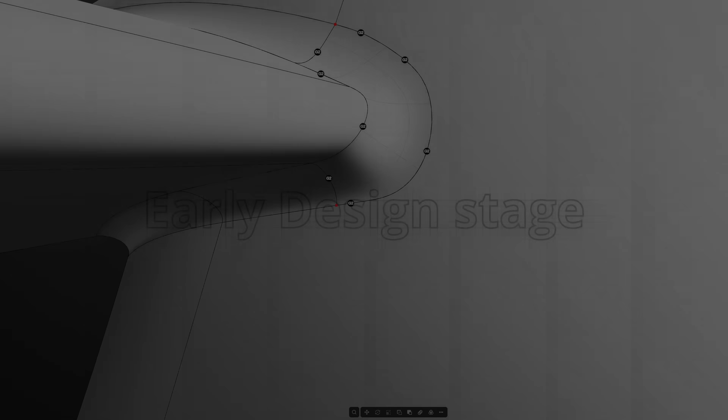So today we're going to do a bit of a deep dive on the early stages of the design process. Chris and I worked together to create the front clamshell of the MRS, basically from the windscreen forwards.

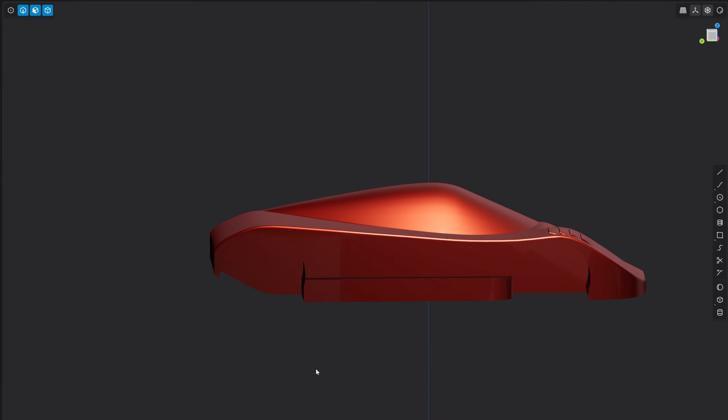So about a year before we even bought the MRS to scan, we came up with an initial concept. We were aiming for the front to be based off the 962C Porsche, the side to be based off of the 787B Mazda, the rear to be from a C9 Sauber. So we merged these three ideas together with the MRS wheelbase.

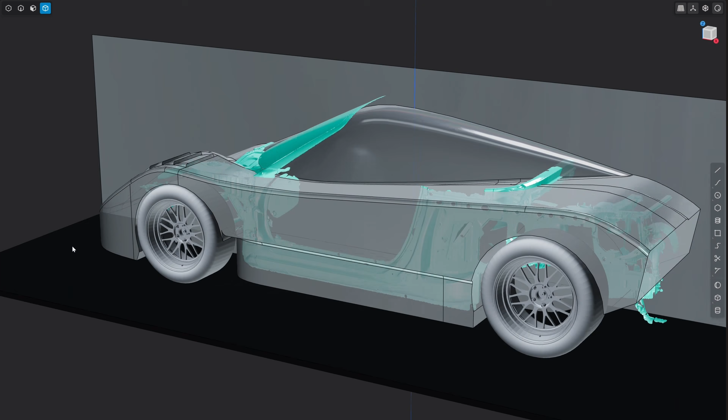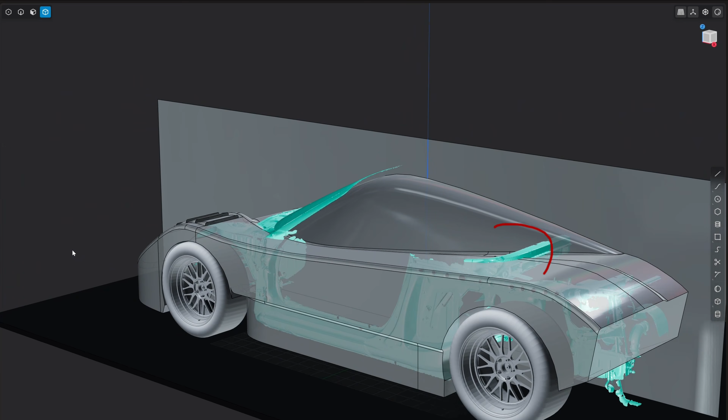Now that we have the 3D scan of the car, which you guys will have seen in our recent video, we can bring that scan into our CAD software. By doing this, we can see what is going to work and what isn't going to work from our initial concept and our 3D scan. The 3D scan poking through the body will show what needs to be cut away or changed in the actual model. So as you can see, there's a few areas that need to change, but overall it's looking okay.

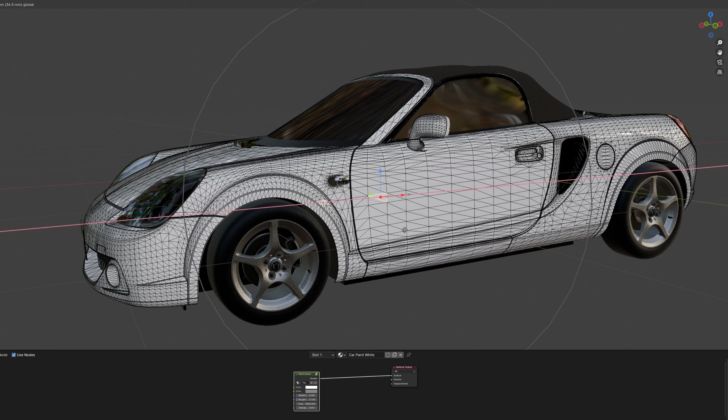Blender is a fantastic animation software that has 3D modeling and rendering capabilities. Its workflow doesn't really tie in with the mechanical engineering based tools that I'm used to. This is due to the fact that Blender uses mesh modeling, whereas all of the other softwares that I've used in the past are solid based. It has a very free-flowing and creator-friendly way of modeling, but it's not very dimension focused. This makes it fantastic for concepts and quick modeling.

In SolidWorks, everything starts with a sketch. That means that everything's derived from dimensions and mathematical formulas. This is great for mechanical engineering, but not great for organic shapes. It does have fantastic tools such as adding threads to holes and aligning multiple components together.

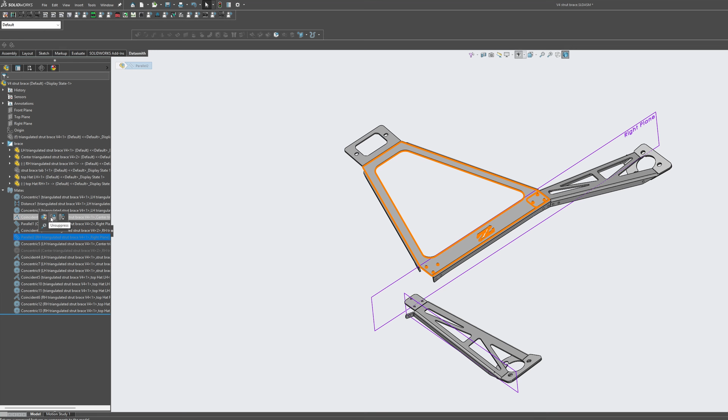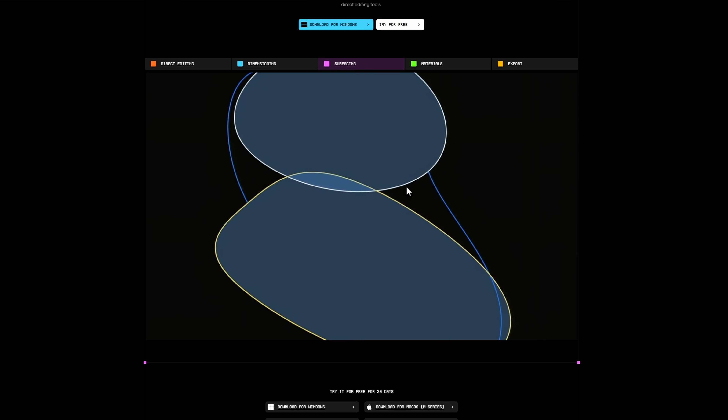I stumbled across Plasticity a few years ago as a similar workflow to a lot of the 3D modeling softwares I'd used in the past. It seems to be fairly free-flowing. It still has some dimensioning capabilities, but it also feels like a nice best of both worlds scenario between something like Blender and SolidWorks. Unfortunately, it's not parametric, but the fact that I can use it to generate the nice smooth surfaces and then import it back into SolidWorks and edit it directly is a huge bonus. This means that when I want to include more components down the road, I can do it in a SolidWorks assembly.

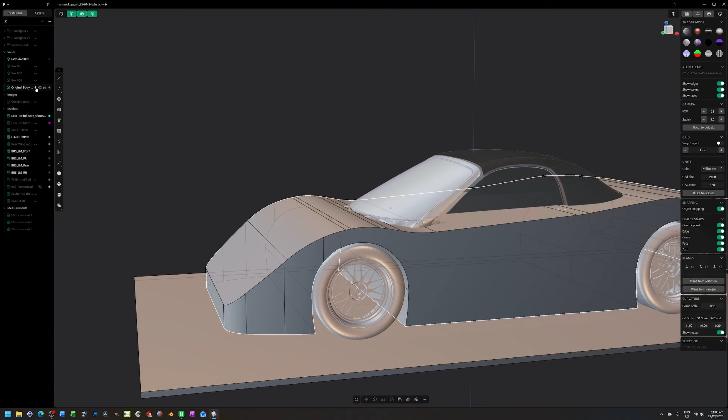To begin with, we'll rough out a few solids, which will be the front, the side, the rear, and the roof. Now, as I mentioned before, the front's going to be from the Porsche, the side's going to be from the Mazda, and then the rear is going to be the Sauber. What I haven't mentioned yet was the roof. Now, as we're going from the standard MRS windscreen, which obviously this isn't the MRS, but it's quite square compared to the teardrop shape of the actual Group C cars, we have to do some pretty clever design work to go from quite a square shape to a really nice smooth round.

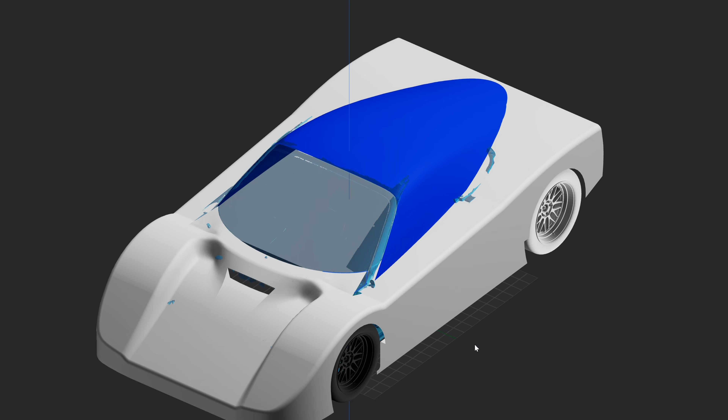We looked for a lot of inspiration from existing cars that do this. One day at a hot rod show, I saw a C6 Corvette, which in New Zealand is very uncommon, there's not many here. That seemed to have a really nice shape to it. So I managed to find a model online of the roof of the C6 Corvette, cut it up a little bit, stretched the proportions slightly to suit, and as you can see here, this is good enough for now.

Now that we've got these rough proportions in place, we can go and refine certain areas. To start with, we chose the nose or the front clamshell because this is the most detail and it's probably the hardest area to do. So we thought if we start with this, once we get it done, the rest should be easy.

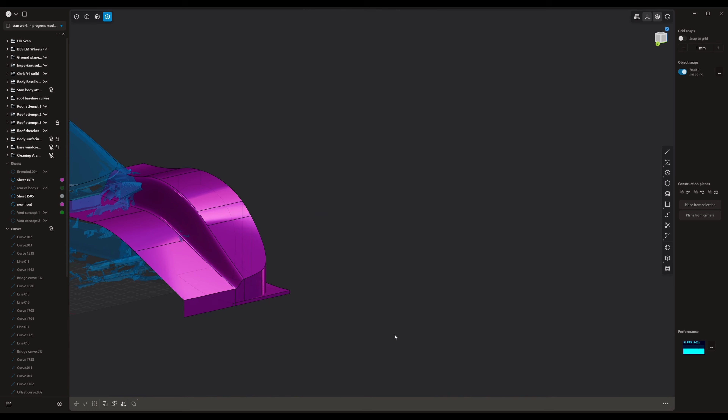Looking at this, we can see that the wheel wells and the front lower section seems to be good. The issue that we're coming into is how high the firewall is below the front windscreen, and we need to find a nice transition to merge all of that together. We tried quite a few different ideas, but we ended up with something that's quite similar to what Nissan used in the R90CK.

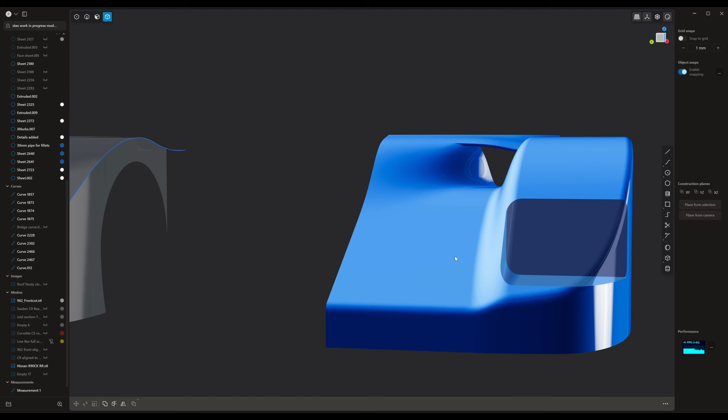You can see it's got 2 vents either side of the bulge in the middle of the bonnet. We need that bulge to house some of the components in the front of the car, like power steering pumps and all those sorts of things. We now have these 2 areas either side of that bulge inside of the fenders that is basically a wall. So we thought we'd cut out a hole there and then duct that behind the front wheel and out at the bottom of the fender.

Now I would love to use AirShaper or something like that to do some CFD analysis. Unfortunately at this stage it's out of the budget.

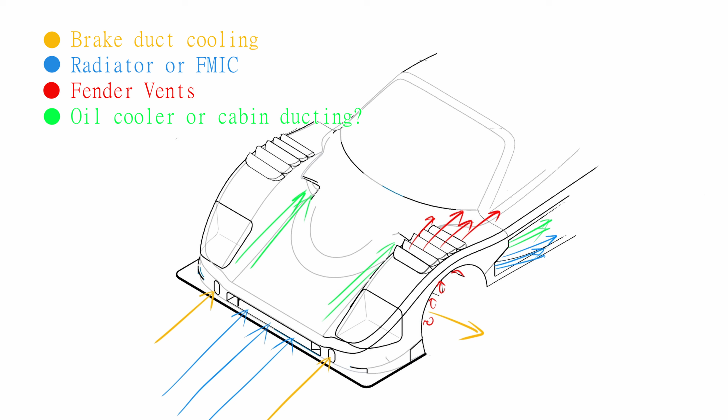So we tried to think practically, using simple sketches to rough out our ideas, making sure that any air coming in has an exit path. So now that we've decided what shape we're going to go with, we need to do some detailed design work and refine this hood bulge.

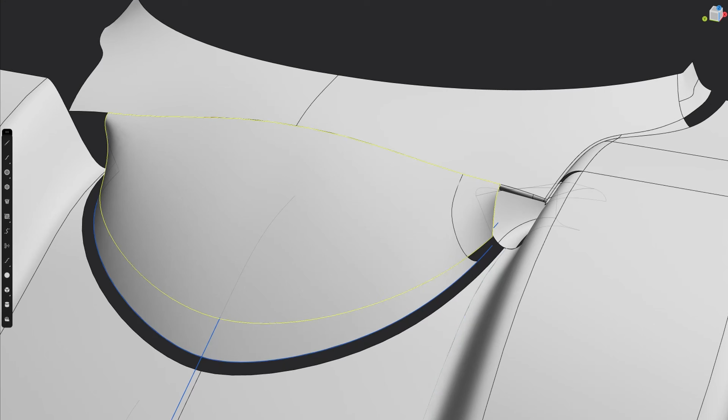Using surfacing, I've created 2 different variations side by side. Turning on the zebra stripes allows me to see how the surfaces interact and which side I think looks best. After doing this a few times, I refined it to a point that I was somewhat happy with it, and then I deleted it all. I ended up recreating the center section from scratch, using some of the shapes I developed earlier as a guide. After a couple of attempts, I ended up at something that I was happy with.

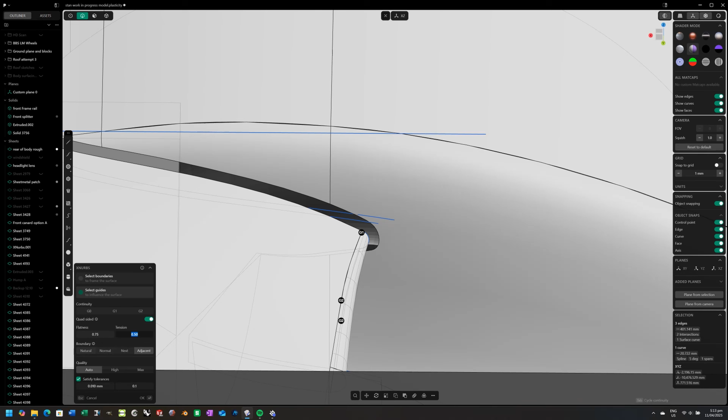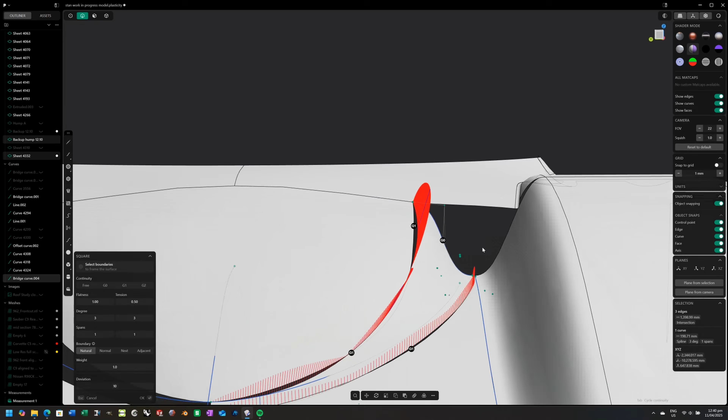Now, one of the issues that I came across when modeling, I go into way too much depth and detail. A lot of this is quite unnecessary because it's going to be 3D printed, a mold's going to be made of it, it's going to be refined by hand, so the fact that I'm going into all this detail with G2 continuity is probably a bit excessive. It was an experience for me. My background's mainly in solid modeling, so surface modeling is kind of like that next level up of complexity, which I love. So a lot of this is kind of overkill, but it'll make Chris's life easier when he comes to do the bodywork, so I thought I may as well give it a go.

So I want to join these 2 panels together. This is the top of the front fender and the center section that sits on top of the firewall. I found the best way was to create these tangential lines on the bodywork and then project down onto it. You get 2 nice lines that give you the surface shape and direction. Use the bridge feature, it gives you a nice transition between the 2 surfaces.

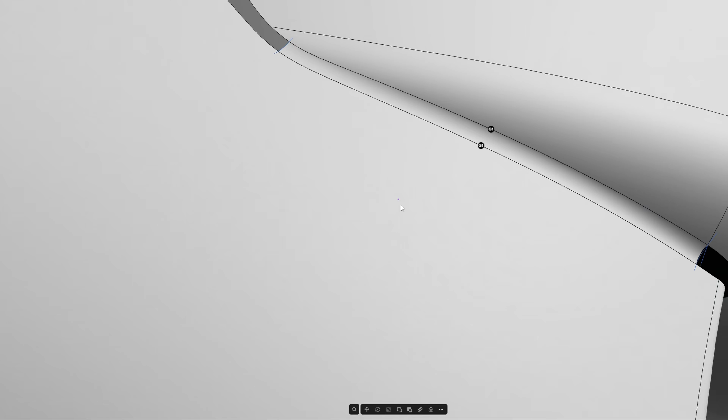If you use lofting, this will create a new surface that bridges the gap. I did this a few times, then in any tricky areas I used X-NURBS, which patches between each of the loft features. This seemed to give the nicest kind of continuity when I turned on the zebra stripes.

We're both pretty happy with this front design. The bulge may change very slightly. It's got exactly what we want in that it's got front fenders of the Porsche 962C. It's got that nice bonnet dip with the fenders either side. And then it's got a solution for the chassis that we're using, which we've styled kind of like the Nissan. So next we'll be working on the sides and the roof, and then we can work on the rear.